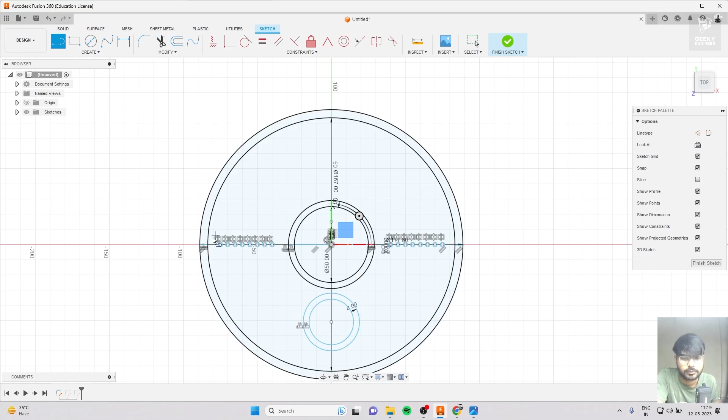Go into edit sketch. Click OK, then try to revolve this whole stuff. Yeah, now it's working fine.

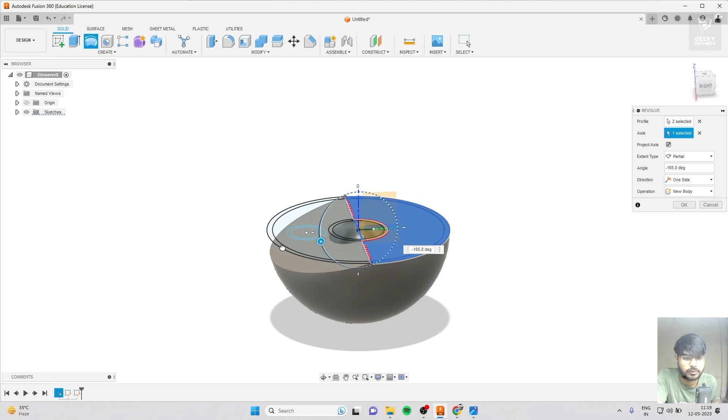Let me revolve it through 180 degrees. Again have to revolve it, this time through this axis, and the angle is gonna be 180 degrees. OK, and there you go.

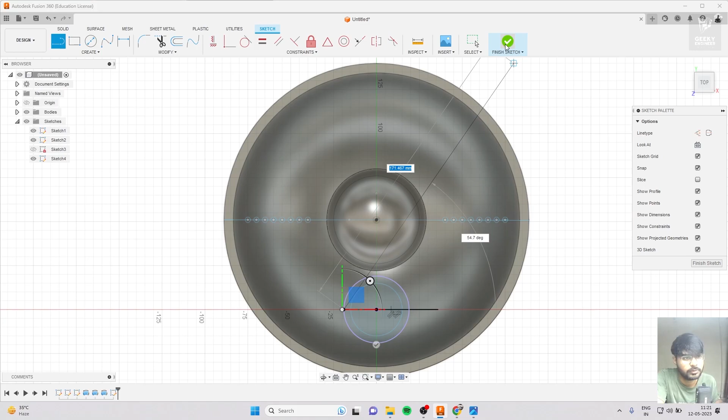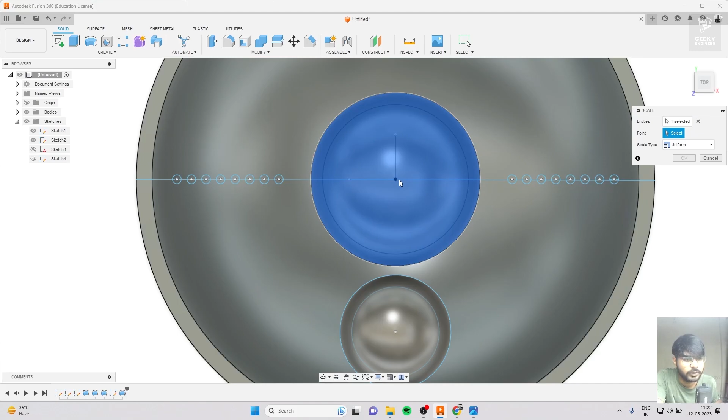Let's go into the scale modifier and we have to select the scale. This one's the scale, and just scale it. Sorry, we missed the point, so this one is the point. Yeah, it's automatically gets scaled.

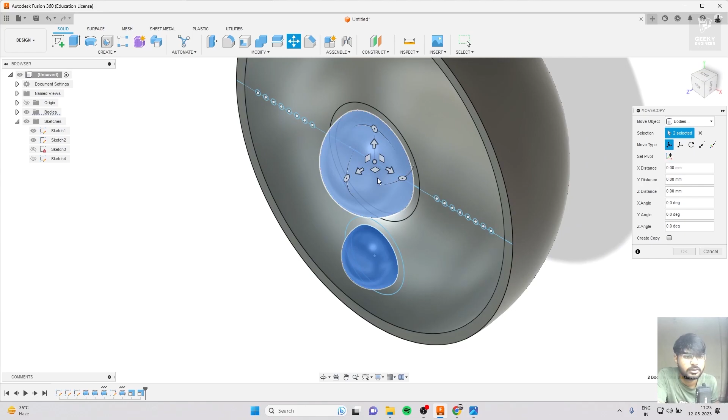Now go into the scale again, go into the circle, choose the point. This is the point, and let's scale it. Move it a bit inside to the move. Let's see the profile. I think this would be fine.

Now we just have to extrude this panel a bit. Let's make it a new body.

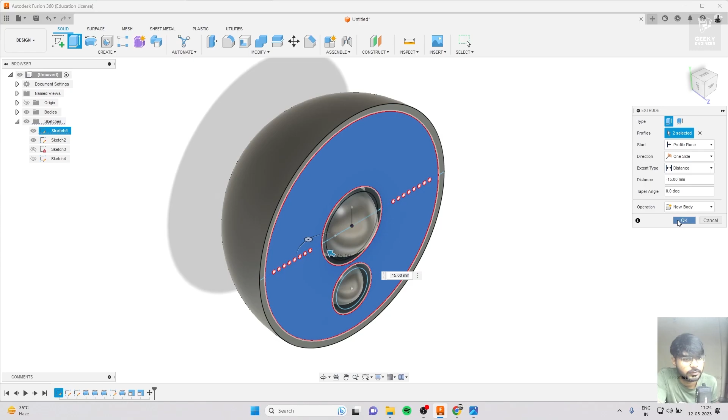Yeah, furthermore, and after that what we have to do, we just have to take this one, this body, and move on to the bodies. This is the body that we have selected.

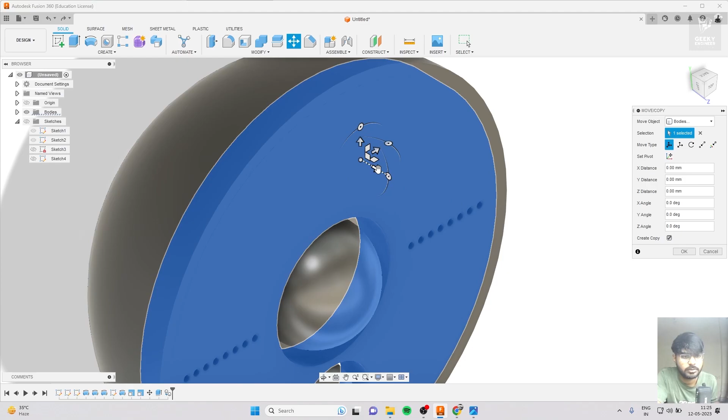Create copy and move it a bit outside. That's fine. Now what we have to do, we just have to scale it down, and I'll scale it again to the center. Yeah, I think that's fine.

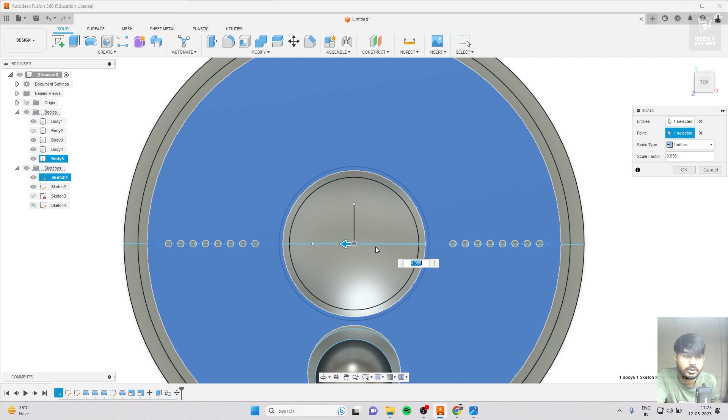So guys, what happened is when we scaled this down, we forgot that these go through holes are also gonna be scaled down. And after that, if we're gonna subtract it, then this will hamper our profile. So what we have to do, we just have to fill this down.

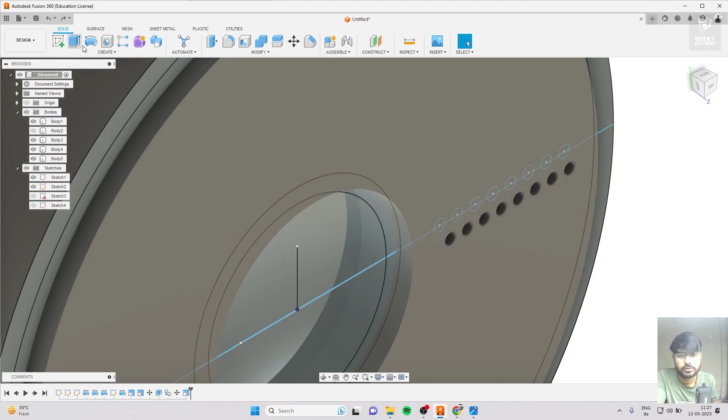So for that, just choose the full one and click on the profiles. Now what you have to do, just pull it out. It will automatically fill down all the body.

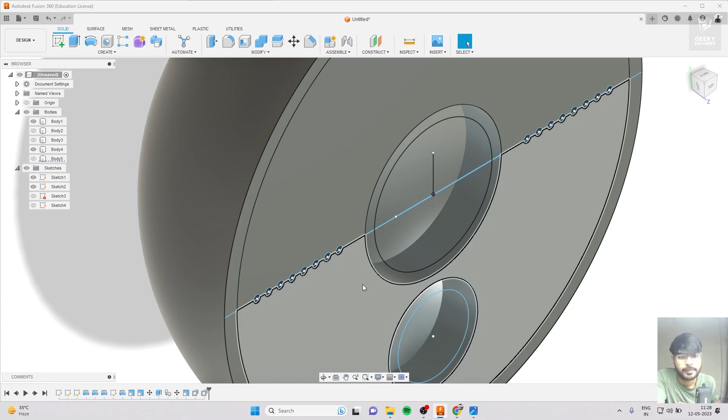Disable this one so that it won't get subtracted from the headlight. Now you have to enable it, and now you are ready to subtract it. Choose the first body, choose the second body, and boom, subtracted.

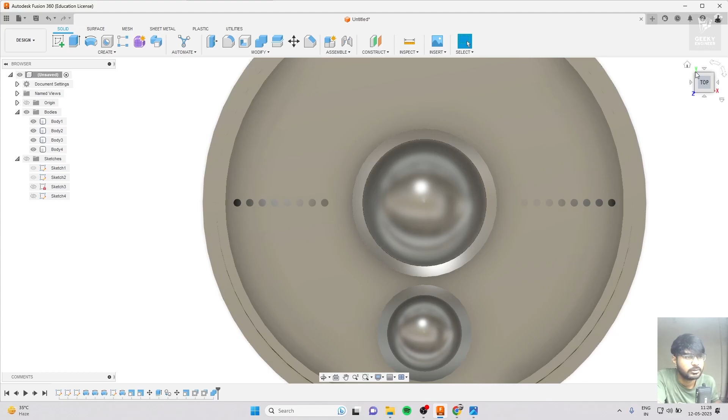Disable the sketch, enable the headlamps. Fine, great. I think this is looking quite odd. Why not just fill it down? Quite odd, not looking good. We have chosen the first sketch and it's overlapping the surface.

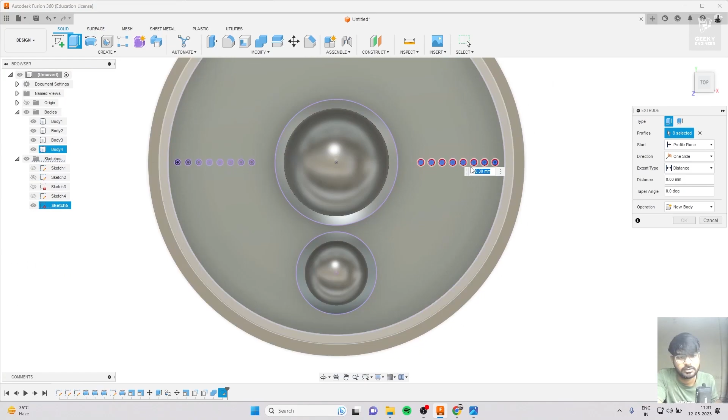That's why we got the error. And now just select these. Click here and it will automatically get filled out.

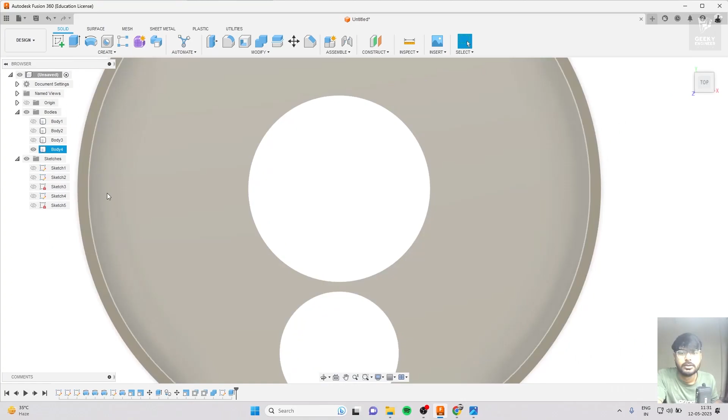Okay, now enable it and again enable the sketch and extrude it, these two. Don't join, make it a new body, so that we can adjust it later.

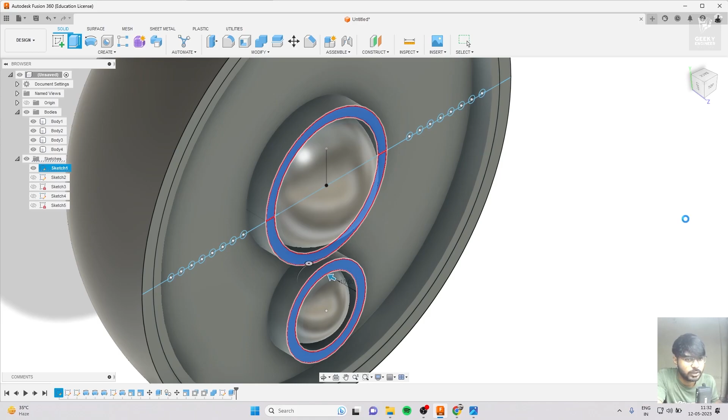Click on these two and now move it a bit, tweak it. Yeah. You can see a bit of gapping here now. So, yeah, I think 0.50 is fine.